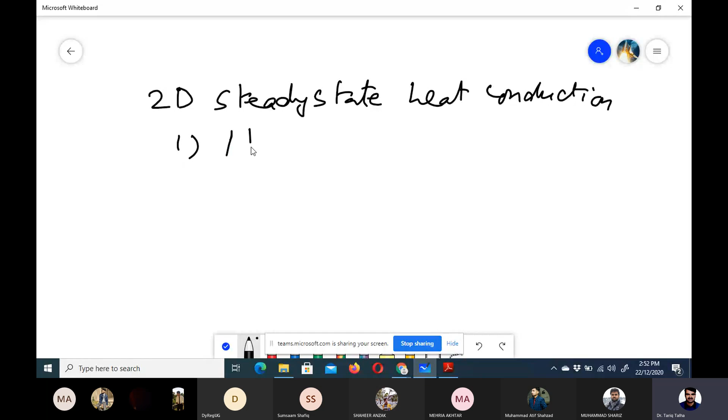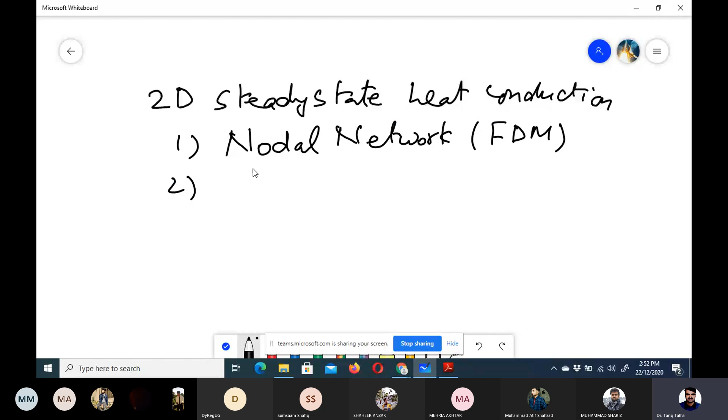Okay, steady state heat conduction, and we did two methods in that. One was nodal network, which is a type of FDM, finite difference method, and the second one was energy balance method, which is FVM, finite volume method.

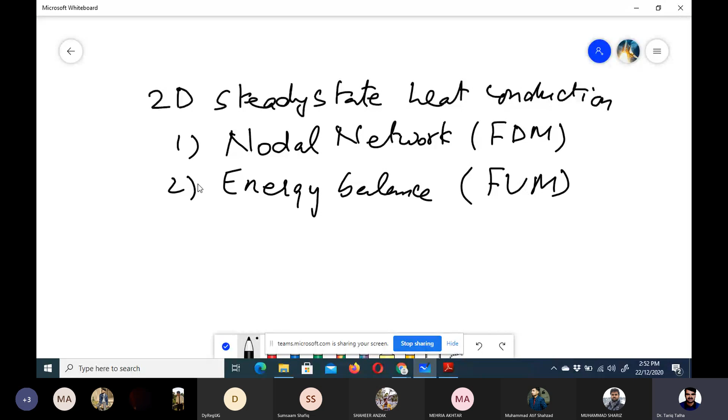So now we are going to look at the transient heat conduction problem. This was basically chapter number 4, so now we are going to discuss one topic from chapter number 5. That is lumped capacitance method.

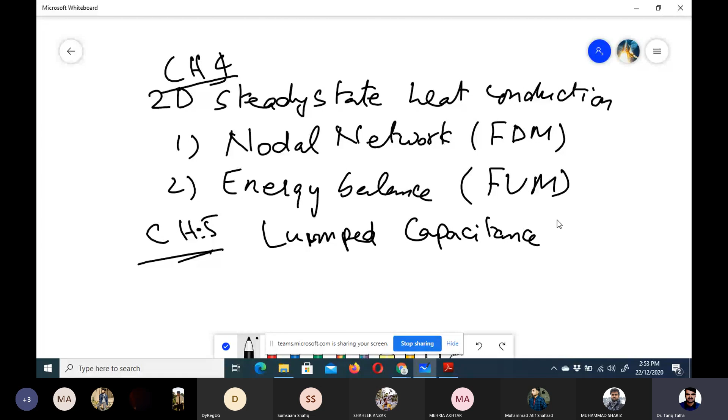Before we start discussing this method, can you tell me or tell the class any example of any transient heat conduction, any practical problem where you can see any conduction happening in transient cases? If we talk about any example from daily life rather than engineering problem, we would discuss that later. But let's discuss anything from a practical problem.

Have you ever done any barbecue? Yes sir. Yes sir, so if you know that we kind of use coals for those barbecues, so first of all...

We kind of use burning coals to roast meat. In that case, if we start from time t equal to 0, that is the time when we put that meat on the barbecue, and then after some time, maybe 10 minutes, that meat is prepared to be ready to serve. So that is one example, the BBQ I have given you.

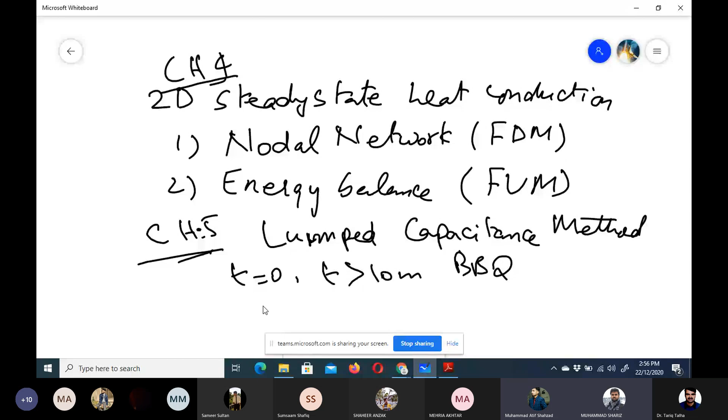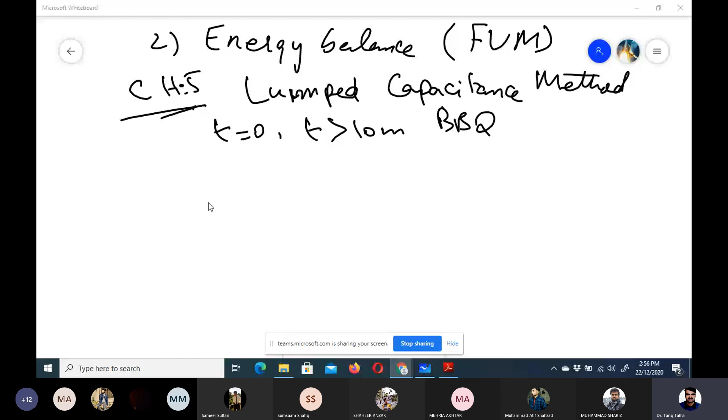In casting, what happens is that usually we kind of use a furnace to have that metal in a molten state, and then we cool it down by using either open air, that is the process of annealing, or we put it in some liquid like water. So that process, if we have got here...

If we have got a container here, which is full of water, and then at time t less than or equal to 0, that metal which we heated in a furnace is at temperature T equal to Ti. Then if we put it at time T equal to 0 into this water, this process is called quenching.

Here the water temperature T infinity is always less than Ti. That's why heat would be transferred from this heated metal to the surrounding fluid. So it means that here the temperature is a function of time. Here the numerator capital T is temperature, and in the denominator the small t is time.

So here we can say that partial T by partial small t would be less than 0. Less than 0 means that temperature would decrease, temperature of this metal would decrease with time. So it means that this object is losing heat, that's why the temperature is decreasing.

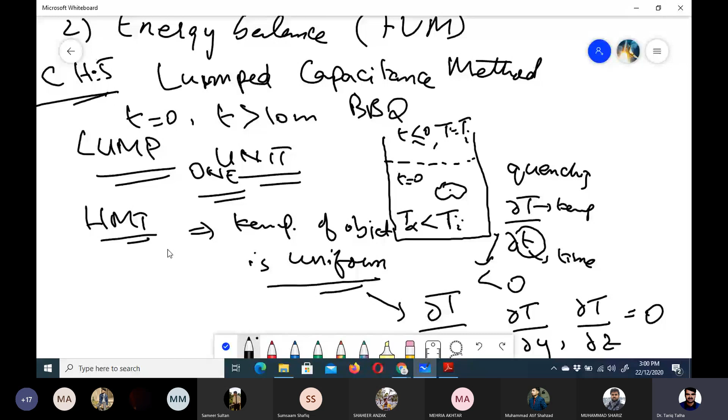So in terms of heat transfer conduction, when would that occur? That would occur when k is a very large value, or maybe we can say it approaches infinity.

It means that when the thermal conductivity of this object is very high as compared to the convection resistance offered by the surrounding fluid, then we can say this object is totally at the same temperature as at the boundary.

So when we consider or assume the lumped capacitance method, we say that the temperature within that object is uniform, meaning there is no gradient of temperature with respect to space. So we are talking about only temperature variation with time, which is partial T by partial small t, since here it is a variation of temperature with time.

So now, if we apply the energy balance on this object. In lumped capacitance method, thermal conductivity of the object is very high, which means the thermal conduction resistance is very low, and the thermal convection resistance is very high.

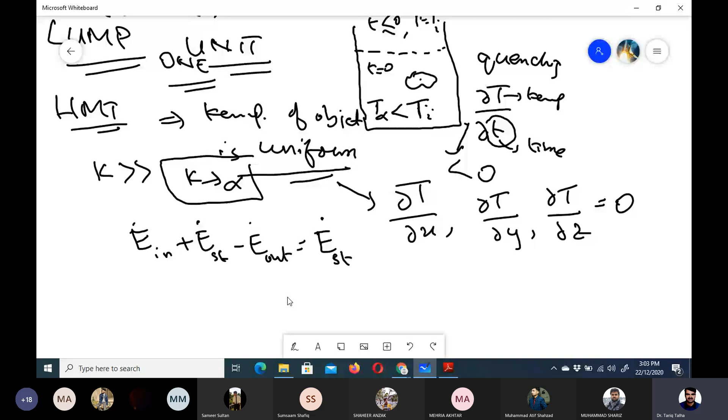So if we simplify this equation, E dot in would be equal to 0 for this case, because this object is losing energy, so nothing is coming in. And because this is a simple metal, not a radioactive metal, E dot g (generation) would be equal to 0.

Now we are left with minus E dot out is equal to E dot st.

So now if we further simplify, what would be E dot out? How can we write E dot out? That is basically the heat transfer due to convection. So we can write minus h into As.

As is the surface area of this object, into T which is a function of time. We can say that this is a function of time minus T infinity.

Okay, what is E dot st? That is m into C, where C is the specific heat capacity. That would be Cp in general, but for the solid, Cp is equal to Cv is equal to C, so we write it as C, the specific heat.

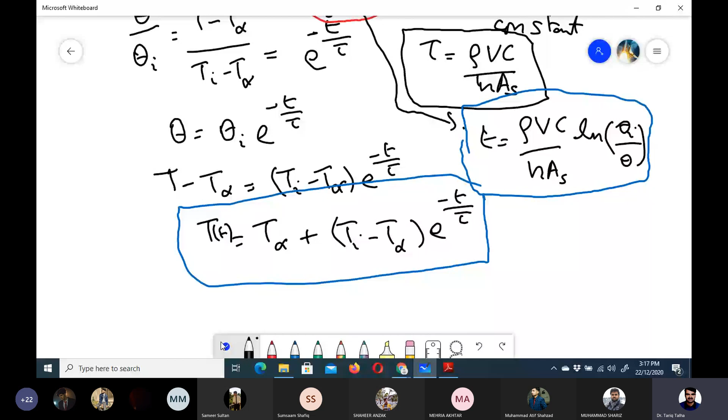So now, let me take you back to the beginning of this lecture. If you remember, lumped capacitance method was the name of this method. Now, lumped, we discussed in the beginning, what does it mean?

This lumped means T is uniform inside this object. So it means that partial T by partial X, partial T by partial Y, and partial T by partial Z is equal to zero. So temperature is only a function of time. That explains this lumped thing.

But what is capacitance here? So now we need to define the thermal capacitance, because that is being used in this. So we need to identify that. Let me go back to the final equation.

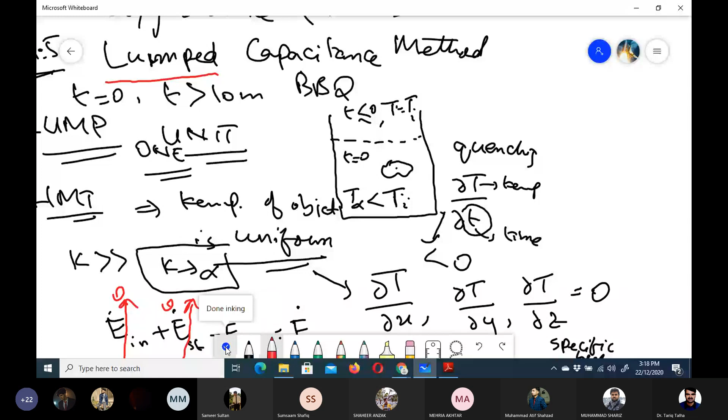Now, if I write this thermal time constant tau again, tau is equal to rho Vc upon hAs. I can write it in a rearranged form: 1 upon hAs, and this is rho Vc.

This first term, what is this? This is thermal resistance of the surrounding fluid. So we call it RT.

And what is this second term? This is the ability of that material to store thermal energy, because rho into V is mass and C is the specific heat capacity. So that is our CT, which is called thermal capacitance. And this is thermal convection resistance of the surrounding fluid, which we already know.

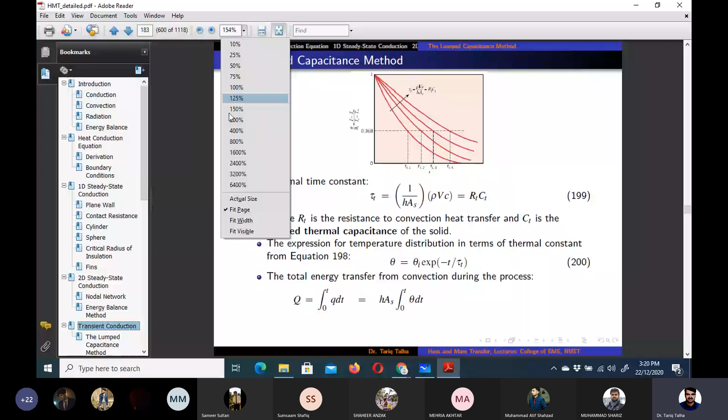So let me show you that graph. Here it is, if I make it a little bit more, maybe 400 would be good. I think now we can see it more clearly, right? So now if you look at this graph, on the x-axis we have time,

and on the y-axis we have the temperature ratio theta upon theta I. So at the beginning when time is equal to 0, then theta is equal to theta I. So it means that all the curves would start at 1, because theta would be equal to theta I at time t equal to 0. In the numerator we would have ti instead of t, so that would be equal to 1, so theta would be equal to theta I. So you see that all the curves start from 1.

Now as we change tau, if we have a lower tau value, then the change in temperature is quite rapid. Rapid means that this theta value decreases quite sharply for a larger value of t, or smaller value.

But as we increase tau, we are increasing the thermal capacitance of that object, this is the rho VC we see, right? So increasing tau means that when the thermal capacitance is more, it can store more energy, and it has more resistance to the convection. So it means that when the thermal capacitance is more, it will lose energy slowly.

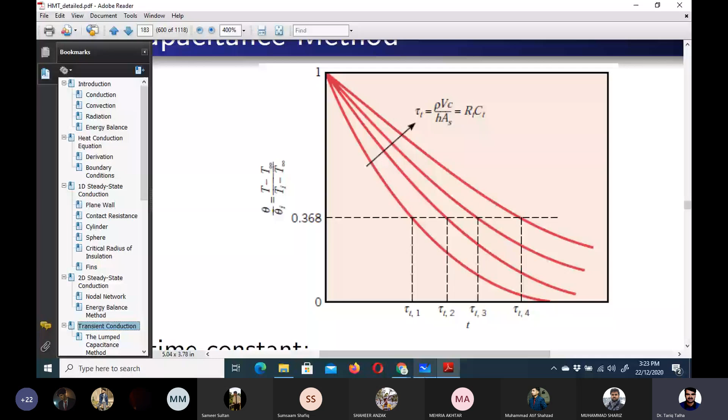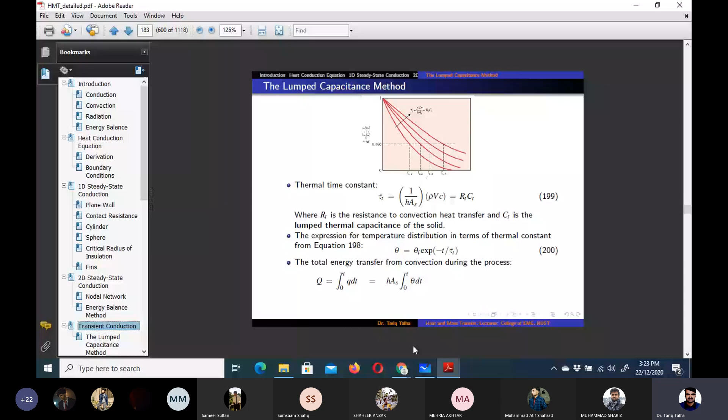Okay, so now let us go back to the slides, whiteboard. So now we have defined up till this equation. We have just studied the physical significance of this thermal time constant, about the thermal capacitance, and how it makes the transient process more rapid or gradual.

So now if we want to know the total amount of heat transfer which has happened during our transient process, that can be calculated by integration. So for that, if we write total amount of heat transfer, that would be equal to Q is equal to,

because in this the heat is being transferred by convection, we can write h A s into, that would be equal to h A s into, theta, which is basically T minus T infinity, into dt, over a time period. So the time period would be from 0 to some time t.

Now what is theta? Theta can be written in terms of theta I from this relation. Let me show you the relation, this one. Theta is equal to theta I, exponent minus t upon tau.

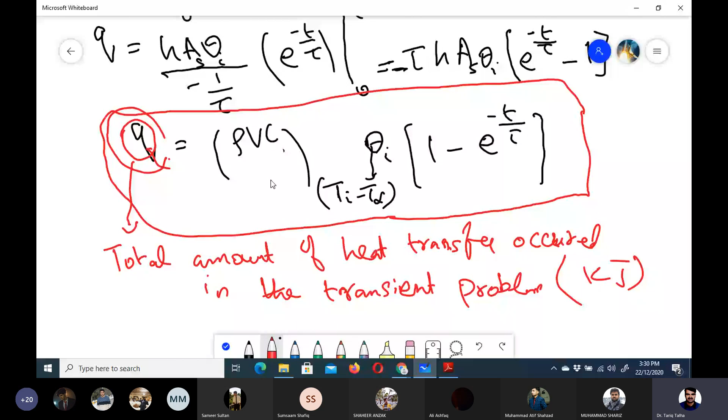Not, because we are multiplying the convection heat transfer rate with time. If you go back to the original equation from where we start the integration, we multiplied the convection heat transfer rate with time. So when we multiply something with time, and it is kilojoule per second, the second would be cancelled out with time, so we get the unit of this Q. So it should be capital Q, not lowercase, because that would be confusing for you all, so I put it equal to capital Q.

I hope that this point is also clear. Now there is one thing left, which is the Fourier number. That is a dimensionless time. So how can we get that from this thermal time constant?

In this equation, where we wrote log of theta upon theta i is equal to minus hAs upon rho VC into time. If you recall, that is hAs into time upon rho VC. So okay, let's just postpone this discussion.

Before that, it is important that we need to know this method is applicable only when the lumped assumption is applicable. So now we would talk about the validity of this method, sorry, the validity of the lumped system analysis.

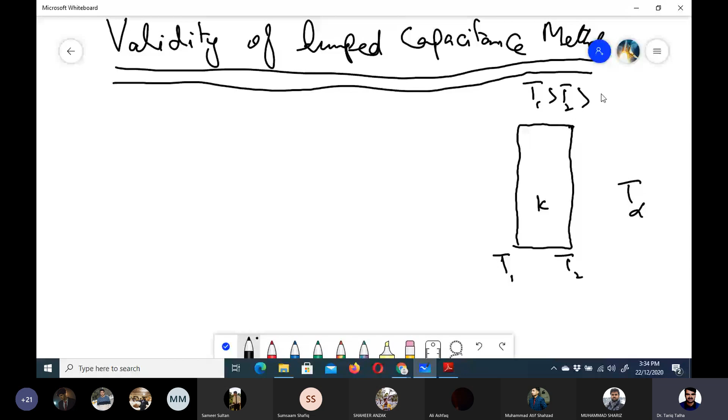So it means the conduction heat transfer would start from the left hand side and go up till the right hand side by conduction, and then it would go out by convection. So if we apply energy balance here at this wall, surface energy balance, we can write that Q conduction is equal to Q convection. So in that case, what would be Q conduction?

That is basically, if we apply Fourier's law, we can write Ka into T1 minus T2 divided by capital L, which is the thickness. This capital L into Q convection, that is equal to HA into T2 minus T infinity. So this is the concept from surface energy balance from chapter number 1.

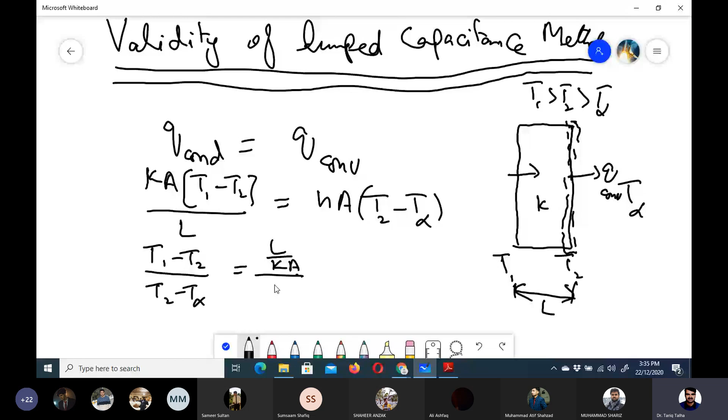So here if we write the ratio of T1 minus T2 divided by T2 minus T infinity, that would be equal to L upon Ka divided by 1 upon HA. So we have written HA in the denominator in this form. So it is equal to the same thing. If you recognize these two things from your chapter number 3 knowledge, this is R of conduction for the plane wall, and this is R of convection.

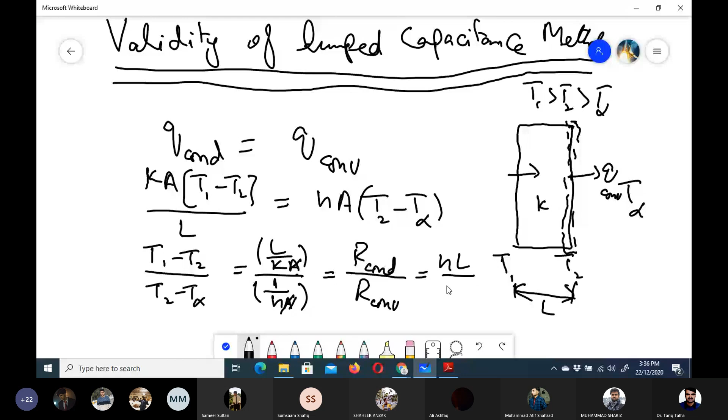So now if we simplify this, the area would be cancelled out, and this becomes HL upon K. So this quantity HL upon K, this is called, by the way, this is a dimensionless property. How can we know that? Because the units of H are watt per meter square Kelvin, and length is in meters.

And what is the unit of K? That is watt per meter Kelvin. So here meter would be cancelled, and then watt per meter Kelvin. So it is a dimensionless number which is called Biot number, which we represent with Bi.

So in order for this lumped capacitance method to be applicable to a particular transient problem, as we discussed in the beginning, the thermal conductivity of that object should be very high. So it means the conduction resistance should be very low. So when conduction resistance is very low, it means that Biot number should be quite less than 1 if we want our calculation results to be quite accurate.

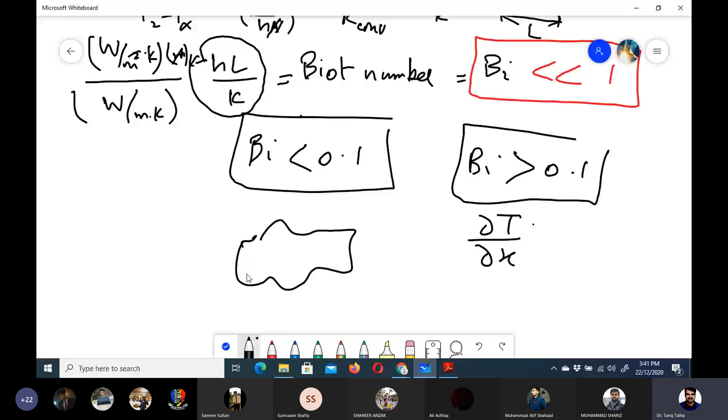So for that, there is a concept of LC, which is characteristic length. If you remember from your 1D analysis of the fin, there we also defined LC, but there it was meant for corrected length, right? Not the characteristic length, but there it was corrected length - that we use insulated tip boundary condition and then we have to correct the length, right?

But here it means the characteristic length, and that can easily be calculated if we know the volume of this object divided by the surface area of this object, which is A. So if we know the volume and the area, we can calculate the characteristic length, right? I hope this point is clear to all, why we need this characteristic length - because if we have a random object in which it is hard to define thickness, we can define a characteristic length or characteristic thickness for that, which is volume divided by area.

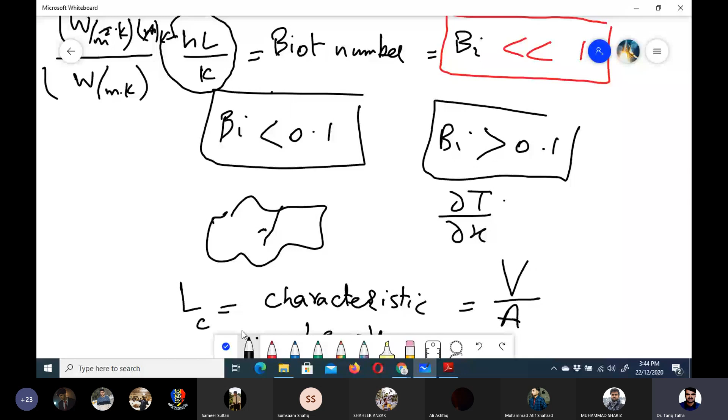Thank you for asking that, because it was quite an intricate concept. So thank you for asking this concept.

And now, because there is another concept of dimensionless time, which is called Fourier number. One thing we have already learned, that is Fourier's law, that is for conduction, but this is the dimensionless time.

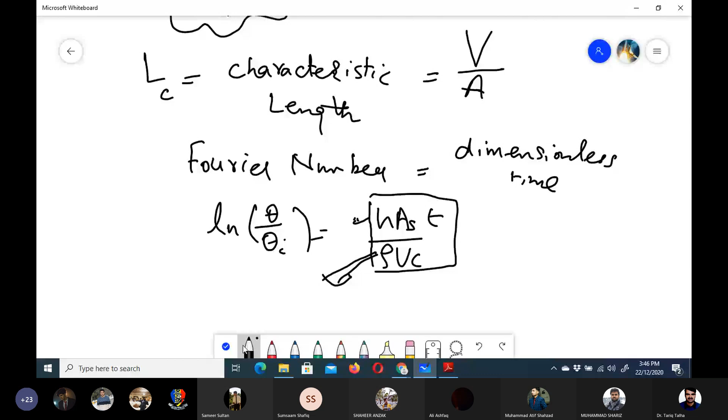So if we write that theta upon theta-i formula which we derived in the beginning, we can say log of theta upon theta-i is equal to minus H A S upon rho V C into time, right? So if we take this bit which is on the right hand side and try to simplify it, we are taking this bit and writing it again here. We can write H A S T upon rho V C again.

Now if you remember from your concept of characteristic length, this volume divided by surface area, that is basically Lc. So we can write it H into T divided by rho into, because this bit is 1 upon Lc, so we write here Lc into C, right?

So now we kind of try to put here the Biot number. For the Biot number, we should have something like H Lc upon K, right? So if we want to have Lc upon K being multiplied like this, then we also need that to be divided here. Then it means that we are writing it K upon Lc, and then the next bit is T upon rho C.

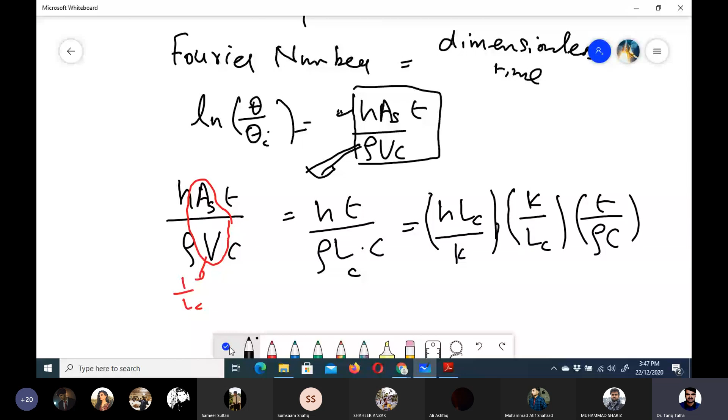So what I did here is multiply Lc and divide K here to introduce the Biot number, because this is the definition of Biot number. But because I have multiplied Lc here, then I need to divide it here as well, and because I have divided K here, then I need to multiply K here, right? So mathematically it is correct, there is nothing wrong, it is just a manipulation of this stuff.

So I can write Biot number here, and then if I rearrange it a little bit, there is as well here Lc, because this Lc should also come here. So it is Biot number, then if I rearrange it a little, I can write K upon rho C. This is K, this is rho C, so I take this rho C here, and then I can write here T upon Lc square. So I have taken Lc here and rho C here, so mathematically again correct.

Now from chapter number 1, we know that K upon rho C is alpha, which is thermal diffusivity, right? So now we can say that we have got Biot number into alpha T upon Lc square. And then this quantity, alpha T upon Lc square, that is the Fourier number.

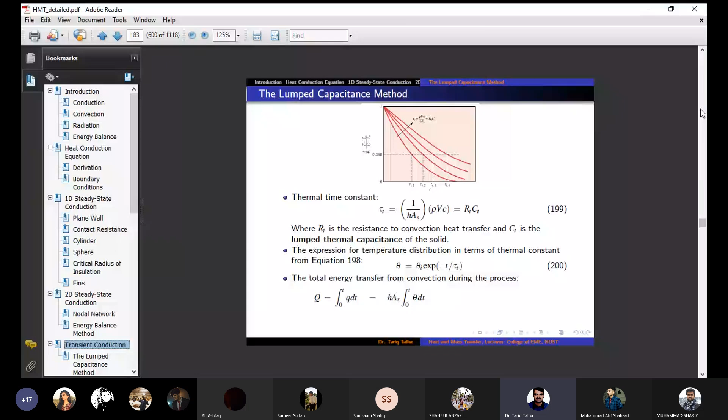Okay, let me quickly recap what we have discussed up till now, and then we can do some two numerical problems. So first of all, we talked about the lumped capacitance method.

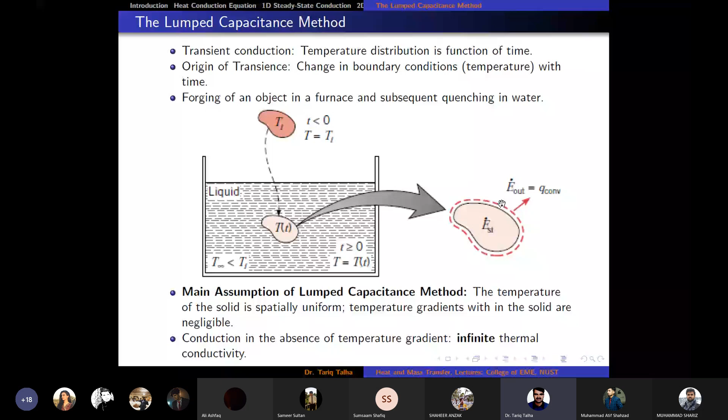We are talking about transient conduction now, and the main assumption of the lumped capacitance method is that the temperature of the solid is spatially uniform. That means whatever temperature is at the boundary, the same temperature would be at the center, so there is no temperature gradient within the body. It means basically the thermal conduction resistance is zero, which can only happen when the thermal conductivity of that object is very high. So here in the last bullet point, it is written: infinite thermal conductivity.

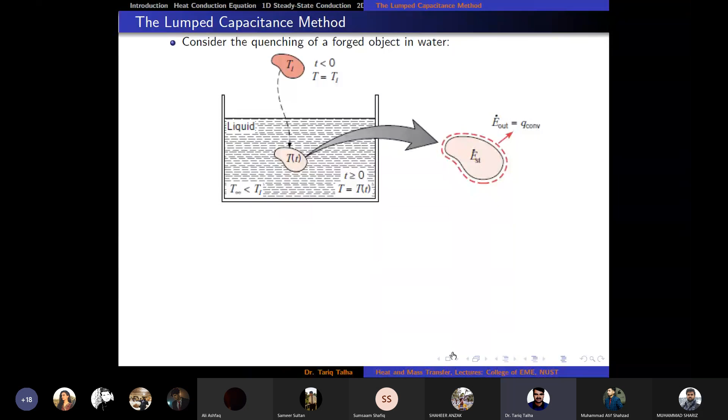So now we are talking about the cooling, or rapid cooling, of a forged object. Forging means we are heating it in a furnace and then putting it for rapid cooling, or quenching, in a tub of water.

So if we do that, we know this would lose energy to the surrounding water. It means E dot in would be zero, and E dot gen would be equal to zero because that is not a radioactive material. So it means minus E dot out would be equal to E dot st.

So if we put in the values: minus h A s into T minus T infinity equals rho V c dT by small dt, where capital T is temperature and small t is time. So now we introduce the temperature difference as a variable theta, which is T minus T infinity.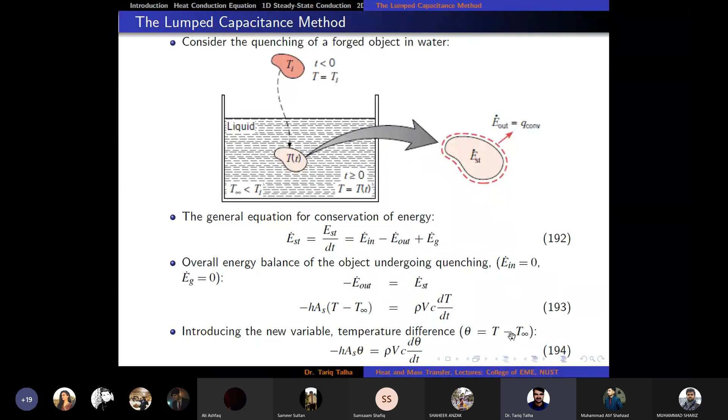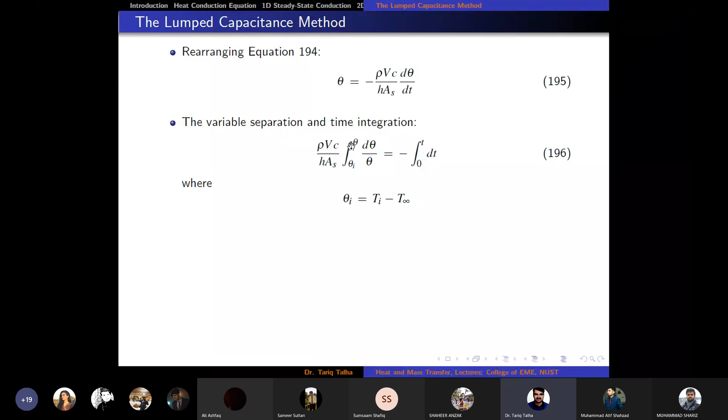Then we can write it in this form, and from here, by the method of separation of variables, we do the integration from theta I, which is the initial temperature difference between the object and T infinity, to some other time where the temperature difference would be less than the initial temperature difference.

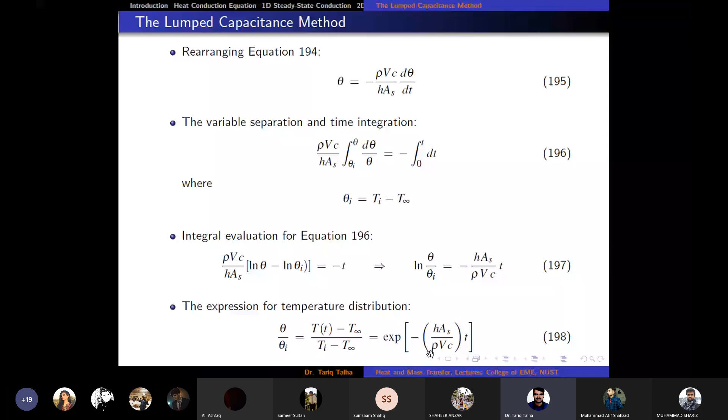So if we do that, we can write it in terms of this function, h A s upon rho V c, which is the inverse of the thermal time constant that we have studied. That is equal to the product of thermal resistance and thermal capacitance, which is R T into C T. So from here, we have also discussed the significance of that time constant, the thermal time constant.

And then we discussed the validity of the lumped capacitance method. In the process, we defined Biot number, which is the ratio of HL upon K, and Biot number should be quite less than 1 for this method to be applied. We say it should be less than 0.1. Then we discussed the concept of characteristic length, which for a random body is volume divided by surface area. And then we discussed the concept of Fourier number, which was alpha t divided by Lc squared. So this is a dimensionless time.

So this is what we have discussed up till now. If there is any query, you can ask. Otherwise, we can do numerical problems for this lumped capacitance method.

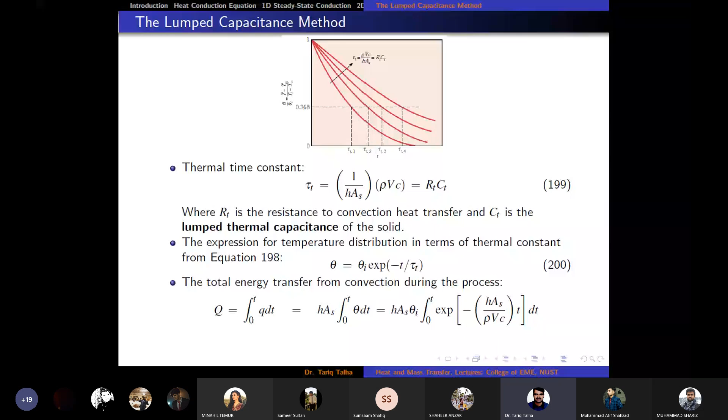That is the ability of a material to store energy. So if a material has a greater ability to store energy, changing its temperature would require more heat transfer compared to a body with less mass, which would require less heat transfer to change its temperature. But if the mass is more, or this C value is more, then we need more heat transfer rate to change its temperature more rapidly. So that is the concept of capacitance, thermal capacitance, to be precise.

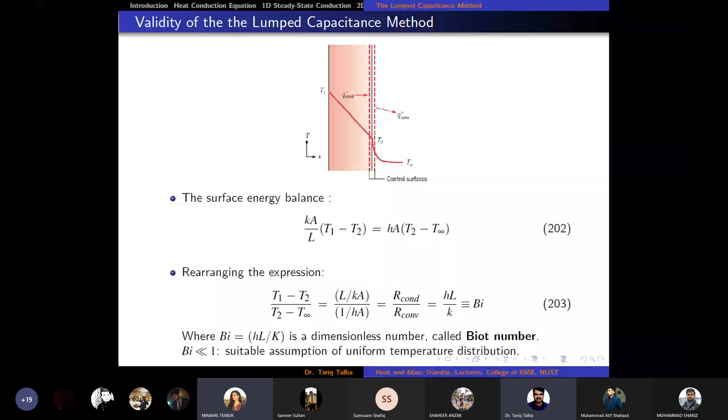Okay, maybe that answers your query. Is that right? Yes, sir. Okay, thank you. So now we move on to the numerical problems.

The first problem: we have some steel balls which are 12 mm in diameter. They are annealed. Annealing is the process where we heat a material in a furnace to a higher temperature, and then slowly cool it in an environment, basically putting it in stationary air, so it cools down at a slower pace, a gradual cooling process. That is called the annealing process.

First we heated it up to 1150 Kelvin, and then slowly cooled it, which is the process for annealing, down to 400 Kelvin in an air environment. We are putting it in a stationary air environment, so that would have a lower cooling rate, gradual cooling, for which T infinity is 325 Kelvin, and H value for that air is 20 watt per meter square Kelvin. Assuming the properties of the steel: K is equal to 40 watt per meter Kelvin, rho value is 7800, and C value, the specific heat capacity, Cp or Cv, that would be equal to C in this case, which is 600 joule per kg Kelvin.

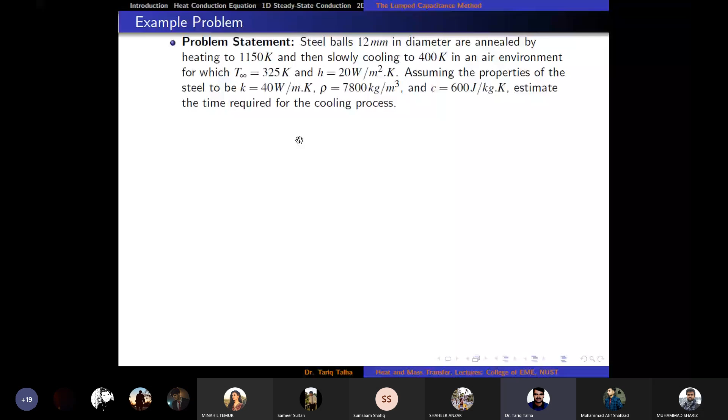So this is our schematic of that. Diameter is given, steel properties are given, and air properties are also given.

First, we calculate the characteristic length, which is volume of a sphere divided by surface area of a sphere. Volume of a sphere is 4/3 pi r cube, or in terms of diameter, pi d cube by 6. Surface area is 4 pi r square, or in terms of diameter, pi d square. If we simplify it, LC becomes equal to radius of the sphere divided by 3.

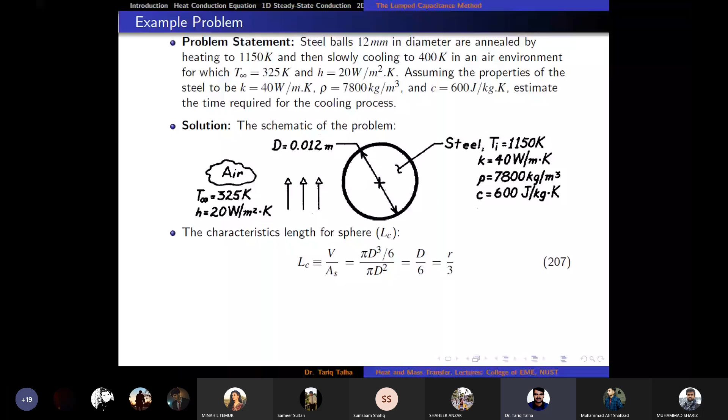Now we put it in the Biot number formula, which is H times LC upon K. H is given as 20 watts, D is 0.012 meter, so the diameter gives radius 0.006. Dividing by 3, that equals 0.002 meters, divided by 40. So the Biot number for this problem comes out to be 0.001.

Since this value is less than 0.1, we can safely apply the lumped capacitance method, meaning the time we get from this analysis will be very close to the real cooling time. If the Biot number were closer to 1, we could still apply the method, but the calculated time would differ from the actual cooling process. The error is quite acceptable if Biot number is less than 0.1. Here it's 0.001, a hundred times less, so the calculation will yield a very accurate actual time.

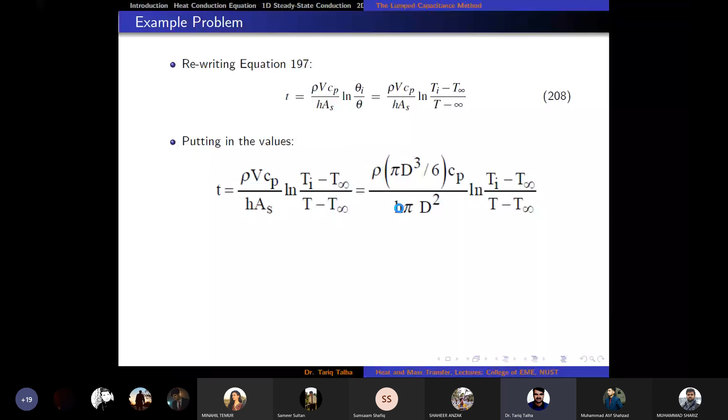Calculating the time, it comes out to be 1122 seconds to cool this steel object from 1150 Kelvin to 400 Kelvin. Dividing by 60 gives around 18 minutes, which is 18.7 minutes, or 0.312 hours. So it's quite acceptable to anneal this, since 18 minutes is a manageable time. Okay, so this was the first problem.

The second problem is a little more difficult. Reading the statement: a solid steel sphere whose thermal properties, rho and C values are given, is 300 mm in diameter. It is coated with a dielectric material layer of thickness 2 mm. So now we have a solid steel sphere.

We have insulated it with a dielectric material whose thickness is 2 mm, and thermal conductivity of that dielectric material is 0.04 watt per meter Kelvin. The coated sphere is initially at a uniform temperature of 500 degrees centigrade, and then it is suddenly quenched into a large oil bath.

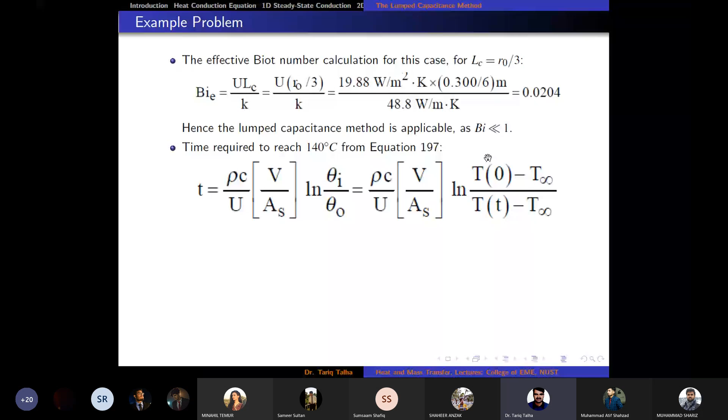Rho value is given, C is also given, V upon AS is D upon 6, and T of 0 is 500 degrees centigrade, T infinity is 100. The temperature, the final temperature where we need to find the time for, that is 140 degrees minus this 100. So if we put in the values, now you can see that...

Even by using the quenching process, the time required is 7 hours. And in the previous numerical, even we did the annealing process in air, that only requires 18 minutes. So why is this difference between these two values?

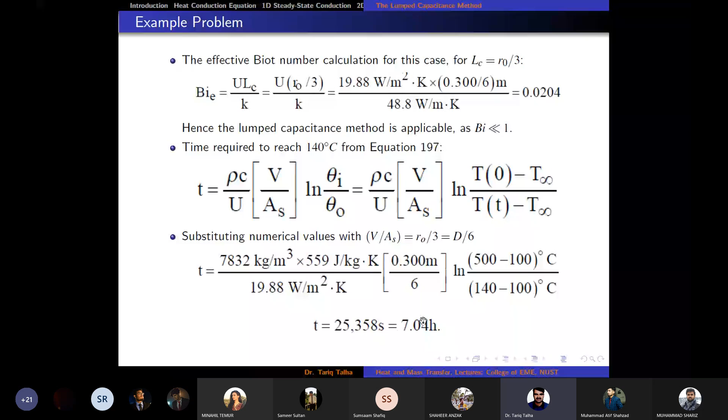Now, getting one value is one thing, but interpreting it physically, why there is so much difference, because in the quenching process we were expecting a little bit more rapid cooling. So why hasn't it got this 7 hours? Any reason for that? By looking at the problem statement...

Anyone? Now that is some engineering thinking, which is very essential for you guys. Why does it require 7 hours?

Because K value, if you look at this 0.04, that is for the insulator basically, that value is very low. So that is one reason.

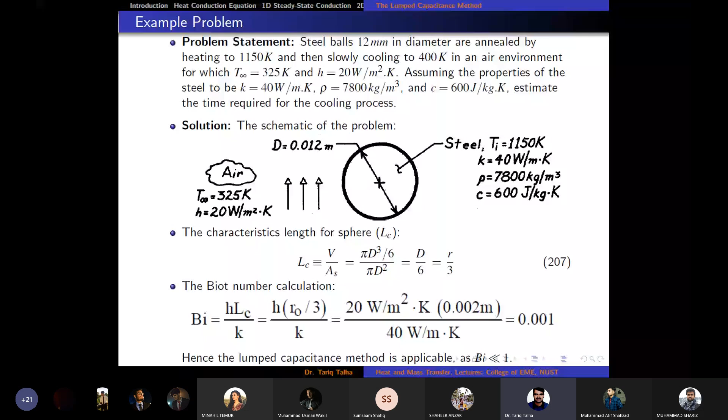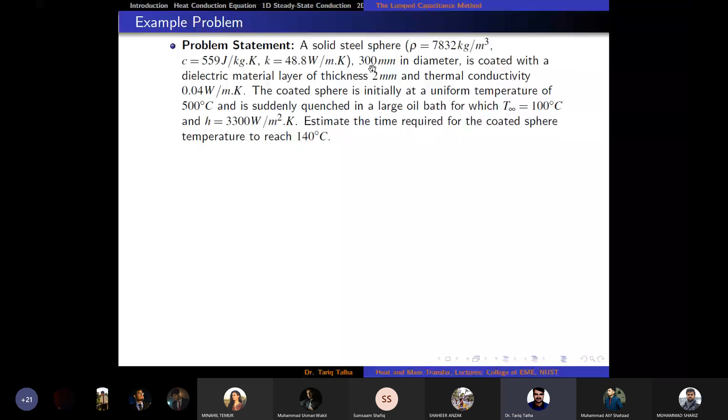Okay, anything else? Here the diameter - sir, the K value is very small. That's exactly right. Besides that, if you look at the size of this sphere, here it is 300 mm. And if you go to the previous problem, its value was 12 mm. Now 12 mm is a very small object, so it would naturally require much less time to cool down. But here it has got maybe 30 times more diameter - roughly if not 30 times, then 25 times more diameter. This means that the object which requires cooling would have high thermal capacitance. Why is that? Because volume is very high.

Rho V C was thermal capacitance, which we had studied in lumped capacitance. Rho V C was equal to C, which was thermal capacitance. So now because the volume is very large as compared to the previous case, it means that the thermal capacitance or thermal ability to store energy is quite high.

So it means that in addition to that we have got additional convection resistance. So if we want to use air instead of oil here, then maybe it would take weeks to cool down.

So it is our requirement to use that oil bath here to bring the cooling time down to 7 hours. What if we had used air here? Then it would have taken maybe a week, maybe more than that. So that is not feasible in terms of any facility...

Where these objects are being forged and then cooled down, the timing should be very less in terms of production, because efficiency depends upon less time of production, so that more can be produced. That's why they are using oil bath here.

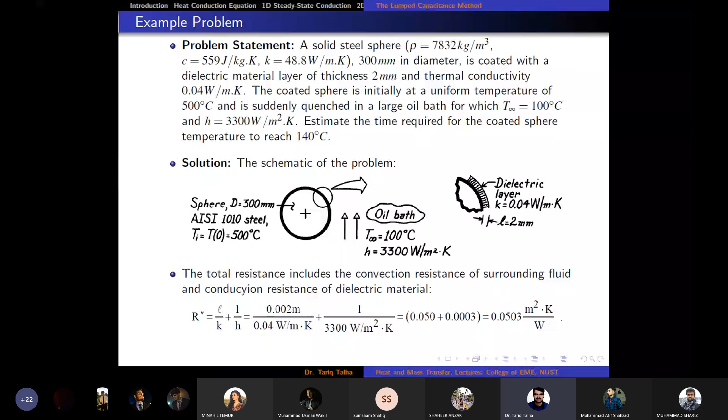Okay, so that was something I wanted to emphasize, apart from the numerical calculation, because that is also equally important. But in my view, interpretation of those numerical values in terms of what is actually happening is even more important in terms of engineering knowledge or engineering sense. So I hope this gives you a better understanding of conduction.

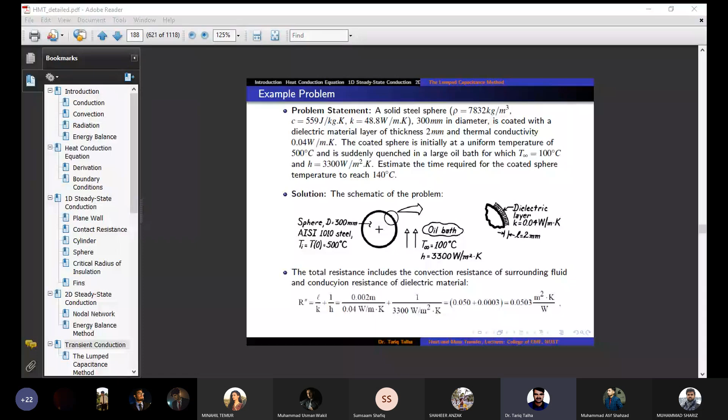So we have only discussed one topic from chapter number 5 - that was chapter 5 of the Incropera book. Now we would move on to convection without any further delay, because convection is a little bit more complex and difficult as compared to conduction, because it requires the solution of...